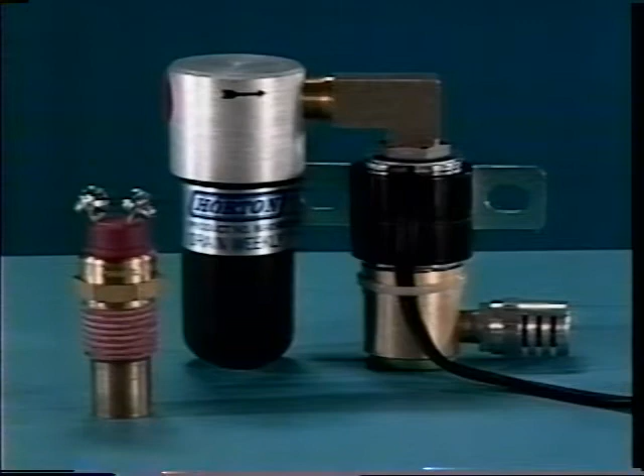To best understand how controls regulate the operation of a Horton fan clutch, you must have a basic knowledge of how all the components of a control system function. At the heart of every control system is the Horton three-way solenoid valve.

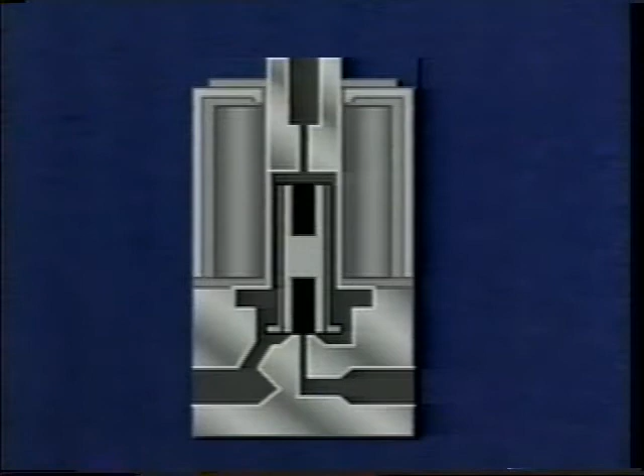The solenoid valve has 3 ports, allowing it to be plumbed 2 ways, normally open and normally closed. Here, the valve is plumbed for normally open operation. Air enters the end port of the valve via the air filter.

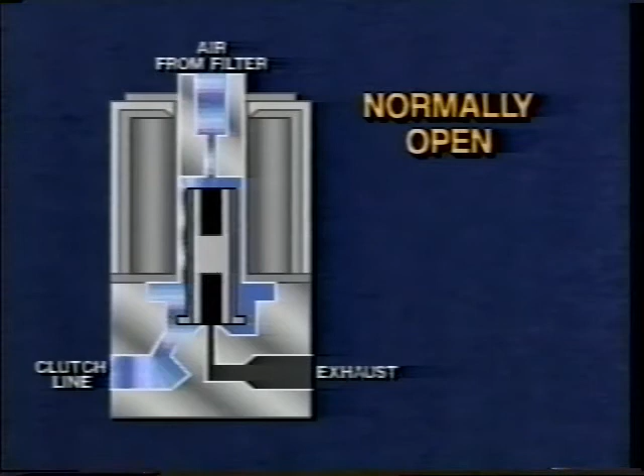Inside the valve, the plunger is surrounded by an electromagnet. Without electricity, the magnet is de-energized and the plunger is held against the lower seat. This opens the upper seat and allows the air supply to flow through the valve into the clutch.

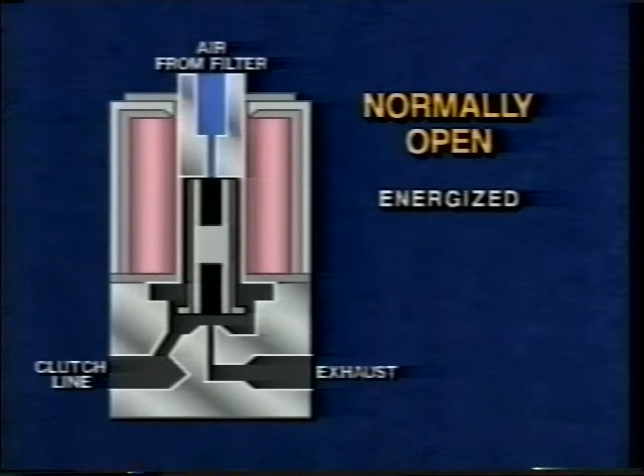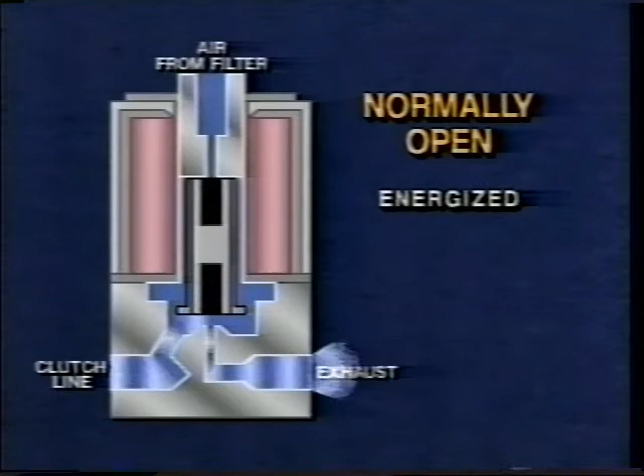With electricity, the magnet in the solenoid valve is energized and pulls the plunger upward, blocking the air supply at the upper seat. As the plunger is lifted, air in the line is allowed to exhaust through the lower seat, disengaging the clutch. Now we'll plumb the three-way solenoid valve to operate in the normally closed mode.

In the normally closed mode, air enters the side port of the three-way solenoid valve via the air filter. When no electricity is applied and the electromagnet is de-energized, the plunger is held against the lower seat and airflow to the clutch is blocked.

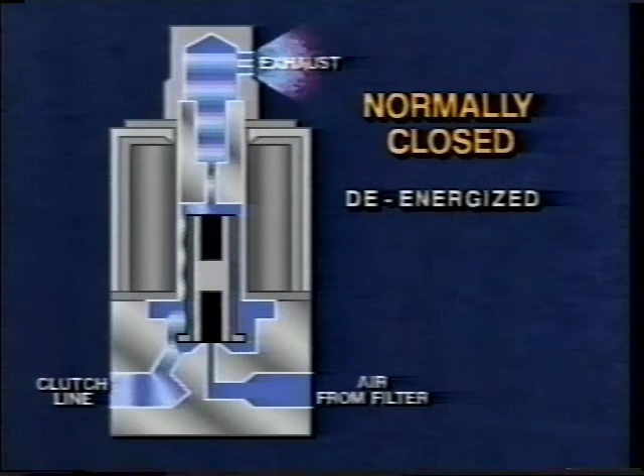Once again, due to the movement of the plunger, the clutch is allowed to exhaust its air through the opposite port, in this case, the upper seat. When electricity is applied, the electromagnet pulls the plunger up, blocking the upper seat and allowing air to flow to the clutch through the lower seat.

As you can see, the Horton three-way solenoid valve filter assembly manages the operation of the Horton fan clutches practically by itself. So when we speak of controls, we're really talking about controlling the operation of the three-way valve.

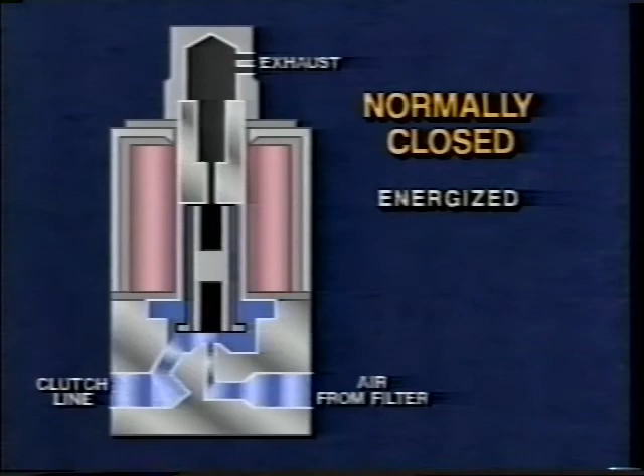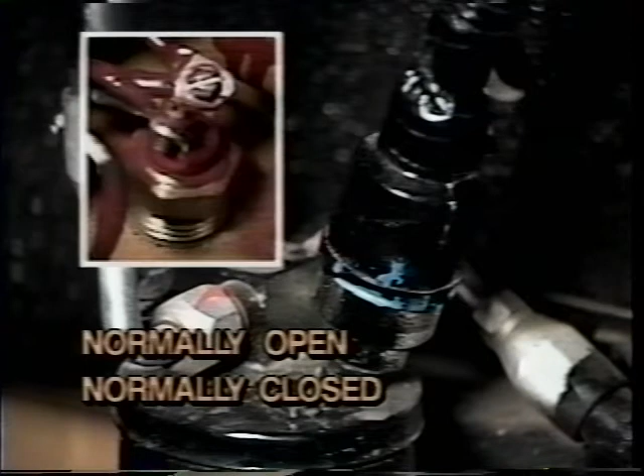A basic control system consists of a thermal switch and a freon pressure switch. Just like the three-way valve filter assembly, an electrical control system can be designated either normally open or normally closed, depending on the type of controls or switches that are used.

In a normally open electrical control system, all the switches will be open or off in their normal or resting state. This is the state at which the engine temperature is below the thermal switch setting and the air conditioner's freon pressure is lower than the freon pressure switch setting.

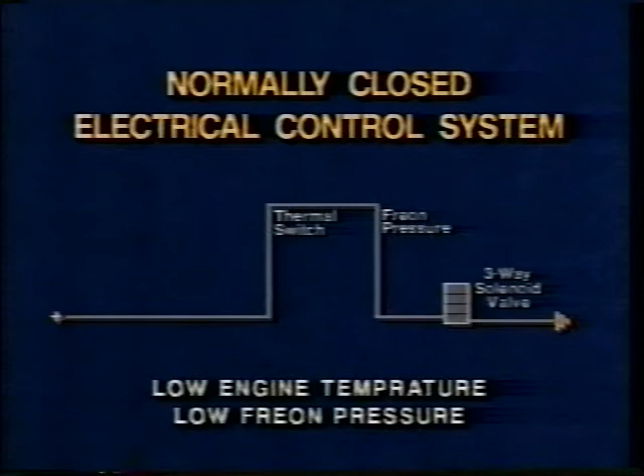A normally closed electrical control system is just the opposite. The switches will be closed or on in their normal or resting state. The most important thing to remember is that you must use a normally closed three-way solenoid valve filter assembly with a normally open electrical control system, and a normally open three-way valve filter assembly with a normally closed control system.

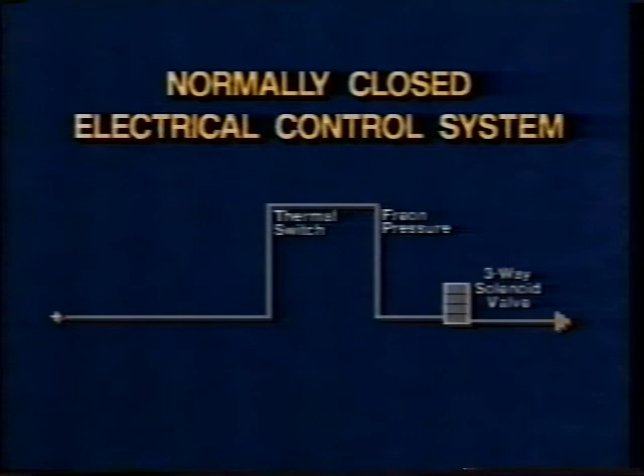This is easy to remember when you understand how the proper wiring of the controls or switches creates a logic state. In this normally closed electric control system, we want the logic state of the switches to indicate if either switch has opened. To do this, a series connection is used.

Electricity runs from the accessory or ignition terminal into the plus terminal on the thermal switch, out of the other thermal switch terminal, and into one of the terminals on the freon pressure switch, out of the other freon pressure switch terminal, and to the three-way valve lead wire. The other three-way valve wire is grounded.

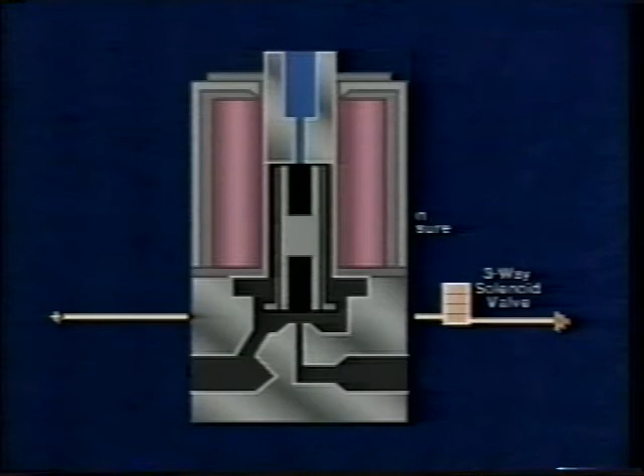Remember, a normally closed electrical control system is used to control a normally open three-way valve. And the electricity passing through the closed electrical circuit holds the three-way valve in its energized or closed state. The fan clutch is disengaged.

If engine temperature rises above the thermal switch setting, or the air conditioner's freon pressure exceeds that of the freon pressure switch setting, the series circuit will be broken or open.

No electricity flows to the three-way valve, allowing it to return to its de-energized or normally open state. Air flows through the valve filter assembly to the fan clutch, and the fan clutch is engaged.

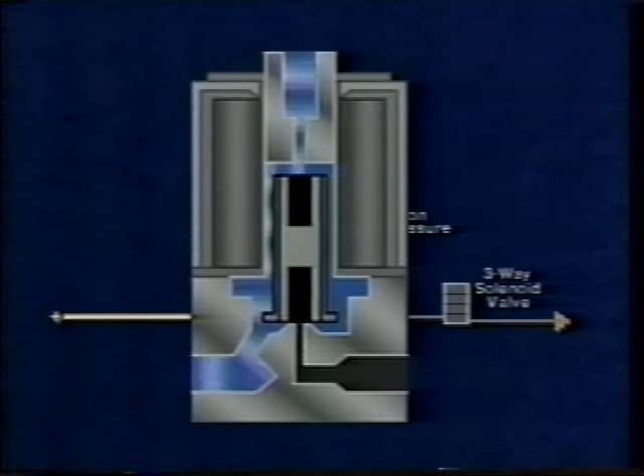Optional controls can be added to this series circuit. To install a manual switch, for example, insert the switch into the series chain so that electricity must flow through the switch when the switch is closed, just like the other controls.

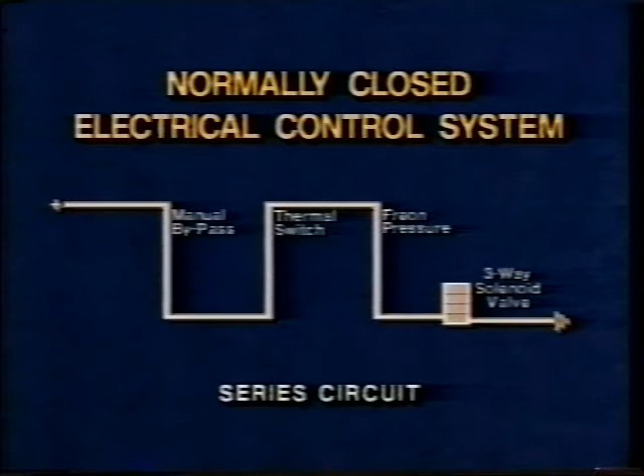Remember the logic here: any switch that opens breaks the flow of electricity through the entire control circuit. Now, with the addition of the manual switch to this normally closed electrical control system, the on or closed position

of the switch is the automatic mode, and the off position is for manual engagement of the fan clutch. In a normally open electric control system, we want the logic state of the circuit to indicate if a switch is closed. Normally open electric control systems are wired as a parallel circuit.

A parallel circuit is made by connecting the positive terminals of all the switches to the ignition terminal and connecting all of the negative switch terminals to the lead wire on the three-way solenoid valve.

Now let's trace the logic as we operate the circuit. With the engine running at a temperature below that of the thermal switch setting and the air conditioner's freon pressure below the setting of the freon pressure switch, all the switches are in their open or off position. The electrical circuit is therefore open and no electricity is sent to the three-way solenoid valve.

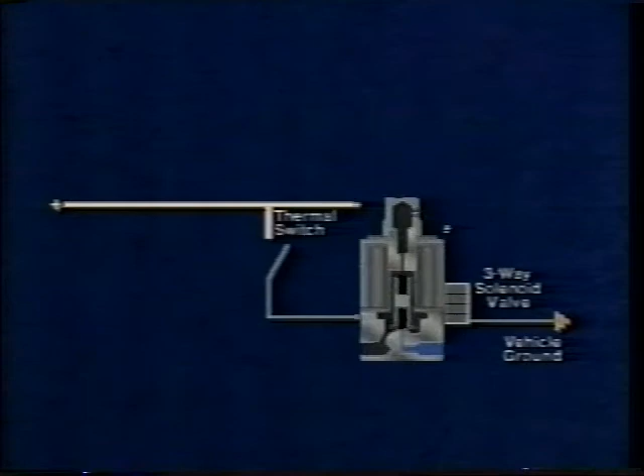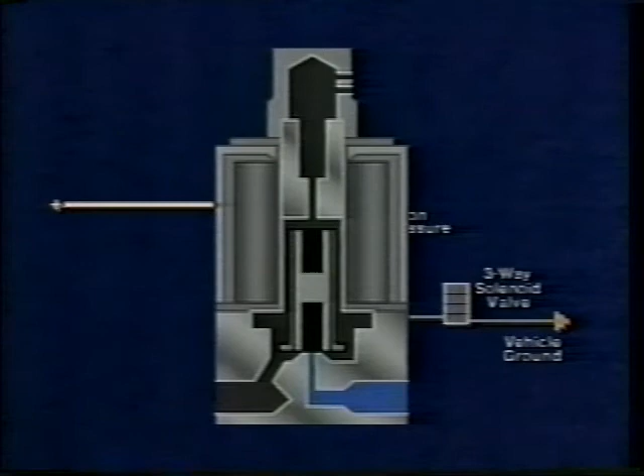The normally closed three-way solenoid valve — remember, a normally closed three-way valve is for a normally open electrical control system, and vice versa — is de-energized and remains in its normal or closed state. The air supply to the fan clutch is stopped and the clutch is disengaged.

When we look at the parallel and series circuits side by side, we see that the parallel circuit has more wires. It's this redundancy in wiring that allows each normally open switch in the circuit to send electricity directly to the three-way solenoid valve. Now, with the engine running, if the engine temperature is higher than the setting on the

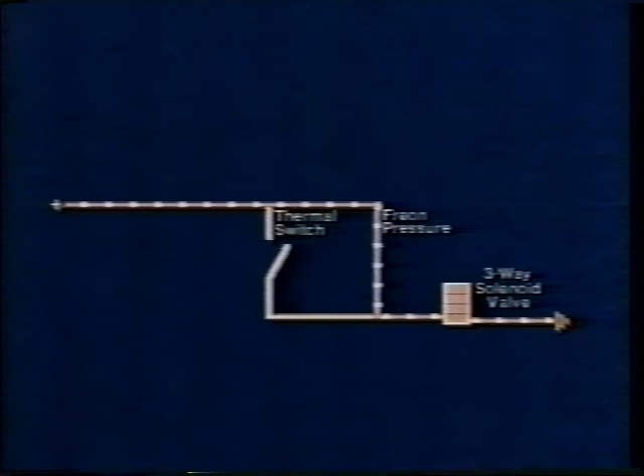thermal switch, or the freon pressure is at a higher level than that set on the pressure switch, electricity is passed through the circuit to the three-way valve. The normally closed three-way valve is energized and held in its open position, allowing the air supply to reach the fan clutch. The fan clutch is engaged.

As with the normally closed or series electrical control system, optional switches can be added. Always remember the logic of the parallel circuit: the switches are all normally open, and the closing of either one must complete a circuit.

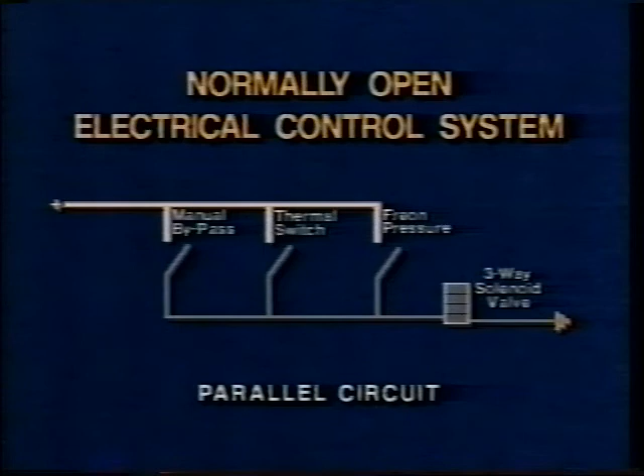Now, to add a manual switch, make sure that one of the switch contacts is connected to the ignition and the other is connected to the three-way solenoid valve lead wire. Like the other switches in the normally open control system, the open or off position of the manual switch is for automatic operation.

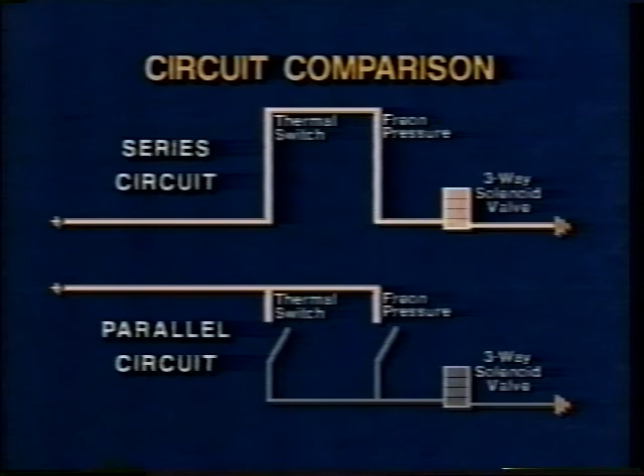Can you see how in the normally open control system, a switch is never dependent on any other switch for completing a circuit to energize the three-way solenoid valve? You should now have a thorough understanding of how controls and the Horton three-way solenoid valve filter assembly regulate the operation of a Horton fan clutch. For three-way valve and thermal switch part numbers, refer to the Horton product line catalog.

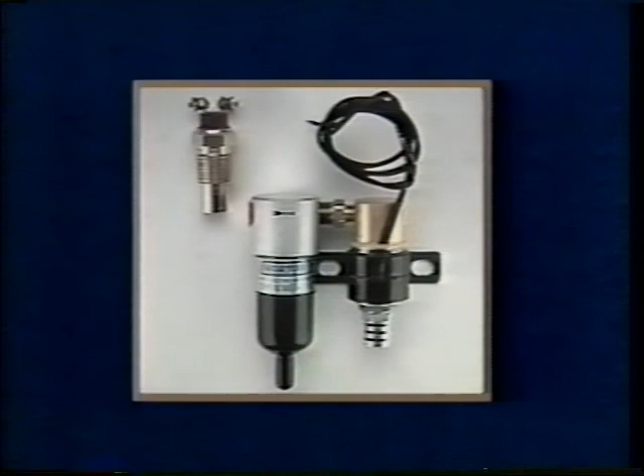Through your understanding of the circuit logic used by these controls, and by following the basic rules presented in this program, you will be able to perform efficient and effective installation and service of Horton fan clutch control systems.